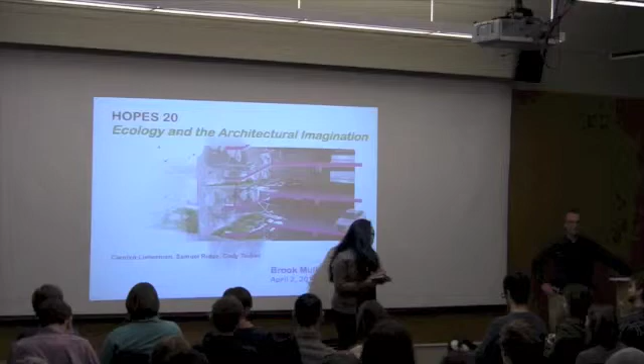So Cassia told me to bellow out. Is this okay? Can you hear me? Okay. The bad news is the book is out, but it hasn't arrived. It's really frustrating because I was hoping to make a killing on you all.

But I'm happy to offer a sneak preview, and I think it'll be very evident over the course of this talk what an enormous influence the HOPES Conference has had on my own thinking, so it seems like a very fitting occasion to talk about some of the ideas that influence the book.

Before I begin, I want to express my indebtedness to many people. This is an incredible intellectual community at this university. My colleagues in the Department of Architecture and the School of Architecture and Allied Arts, and I would say the landscape architecture faculty, have had a huge influence on this project.

Karin Knudsen is here, a former student, a practitioner in town. We co-authored a paper together that really makes its way into this book. Leonard Huey, another student of mine, we've co-authored papers together, who's off on his own teaching career trajectory right now. Howard Davis and Peter Keyes, we co-teach the Architectural Context, Place, and Culture course.

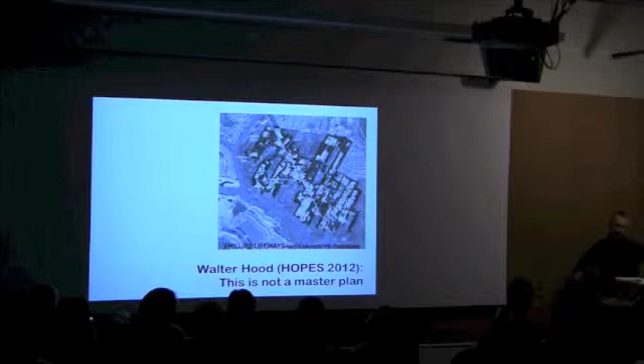So this is a project that Walter Hood did. This is an African-American low-income community in South Carolina that has been occupied since emancipation. There's this low-density suburban sprawl that's encroaching on this. They're trying to preserve some aspects of their community, and he felt that it was inappropriate to describe this as a master plan. He ended up calling it a life-ways plan, that the patterns of living that were what made this community should emerge out of this, as opposed to a more top-down approach.

And so we just did a parking garage studio this winter, but if you call it a parking garage, you've already lost—it's already this dark, damp, inhumane environment. And so we found ourselves thinking about other ways of talking about what this kind of structure could be.

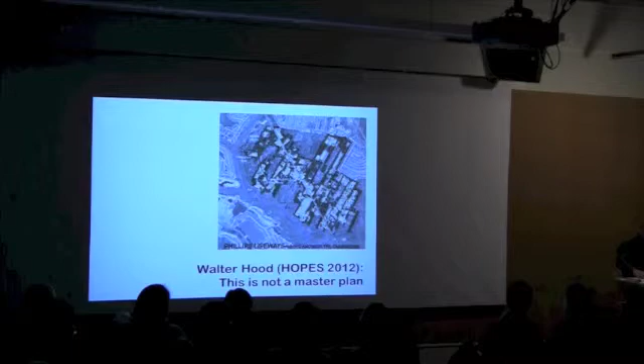Political ecologist James Evans points out a contradiction, that we expect denser cities at the same time we expect them to perform in a more sustainable way. And in some ways this isn't a contradiction—denser settlements are more energy efficient naturally as compared to low-density sprawl. But in some ways, the challenges are greatly exacerbated. We think about challenges related to clean air and clean water and habitat quality and the urban heat island effect and so on and so forth.

And this is where design comes in, as the landscape architect Randolph Hester, in his book Design for Ecological Democracy, so convincingly argues—that that's the inherent nature of the designer, is to identify contradictions, actually seek them, and try to synthesize them and resolve them.

So we must conceive of the city as a locus of ecological possibility. There are many reasons for this. I'm not going to go into detail, but we could speak, for example, of species area curves and the encroachment of human-dominated landscapes on all parts of the land and what this suggests as far as extinction rates.

Or we could think of the fact that cities were often built in places of high biological productivity. Or we could look at the long-term ecological research findings that suggest that there are more species occupying urban environments than we ever imagined. And so if we design urban environments differently, we could make it that much more possible to harbor non-human species.

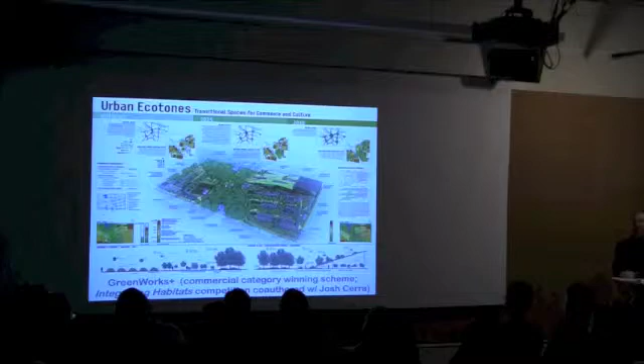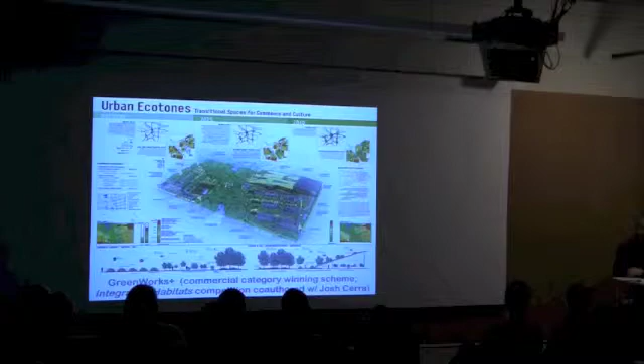The city is an ecosystem like a grassland or a forest, but unlike a grassland or forest, we could design it to be more like one if we wanted to, so we can use the adaptive capacity of the city to its fullest advantage.

Mark Johnson, in landscape architecture, suggests that we are only now developing frameworks to harness hard urban systems, the very systems seen as primary contributors to ecological degradation, as one locus for habitat regeneration.

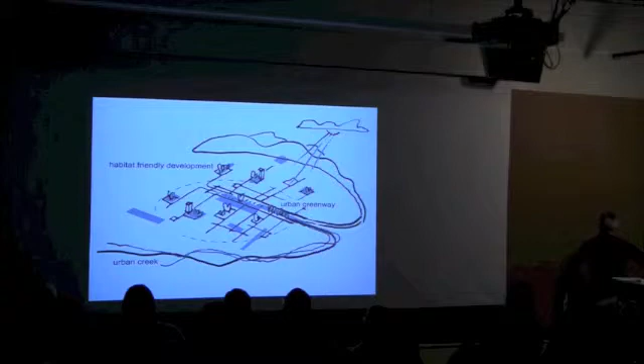There are many facets to this harnessing, one of which pertains to the need to create greater spatial heterogeneity in urban environments. For example, the making of a more sinuous path from the roof to the river so as to slow down stormwater flows and put it to work, or by providing more diverse habitat structures and pathways.

So although this passage pertains to the deceleration of stormwater as a design opportunity, it also corresponds to a broader range of ecological considerations.

Reassessment of the value of underutilized space and the desirability of prolonged transference prompt metaphorical constructs emphasizing surface tension, hovering over and passing through, the staggering of eddies and incorporation of relief valves, variegation, scored, raked, and modeled surfaces, increase in roughness coefficient, and offsets in the X, Y, and Z.

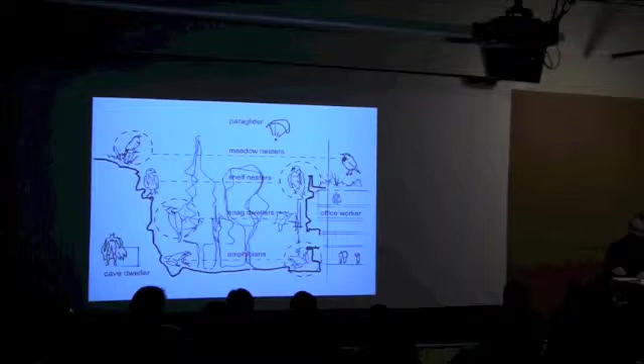A challenge becomes achieving inefficient efficiencies, where certain elements retain compact shapeliness, formal simplicity, and low surface-to-volume ratios—the thermal envelopes of buildings, for example—while associated features gain in morphological complexity in support of habitat function, and where advantage is sought in the interstices.

We're going to find out that 2007 was an absolutely epic year of HOPES, because a lot of these slides are from authors of books who appeared that year.

Joan Iverson Nassauer, the landscape architect, argues that we have to focus on the aggregate of innumerable decisions on private land holdings, that the Jeffersonian small-scale lot is our inheritance for better or worse. People manage those sites, their buildings, their landscapes for reasons other than habitat value, but perhaps with the right incentives we could think of them as aggregating and contributing to a greater system.

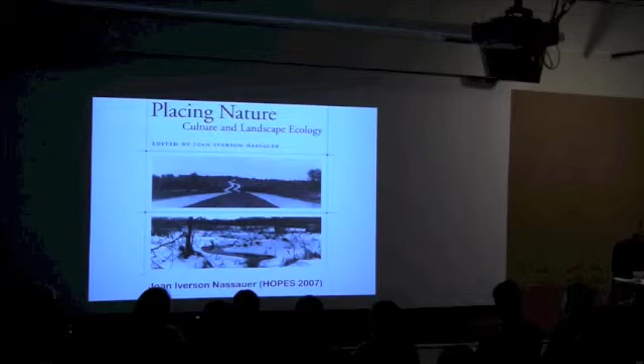We are really lucky in Oregon to have such a progressive planning body as Portland Metro, the only elected regional government in the United States, and their Nature in Neighborhoods program.

It mapped habitat conservation areas throughout the Portland metropolitan region—lands that are privately owned which have significant habitat value, that if maintained, preserved, or improved, could greatly enhance the publicly held lands that operate as the backbone of functioning ecologies in the metropolitan region.

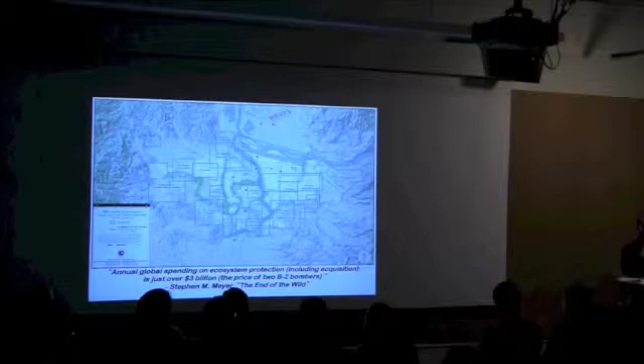So they provided incentives for developers and landowners to think about developing. If there's an urban growth boundary, there is likely to be a lot of infill development, which is probably preferred to expanding the boundary. Maybe we shouldn't be building on places with high habitat conservation value, but it is probably going to happen.

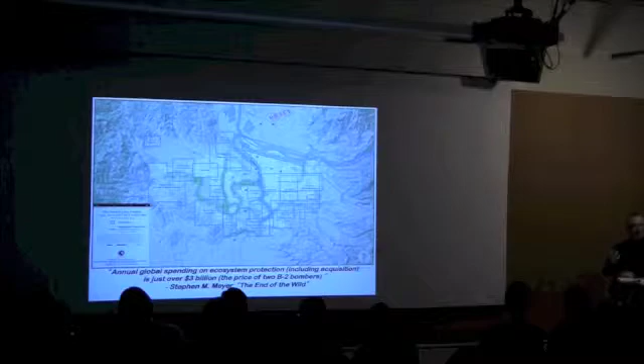So are there ways that it could happen so as to not only avoid harm, but actually improve the biological baseline of these sites? We are not recreating nature.

We are talking about human-dominated landscapes and what landscape architects call the creation of novel landscapes. So we can't reestablish ecosystems in all their complexity, but we can reintroduce or encourage certain functions. An important and difficult question becomes which ones—are there umbrella functions, for example, that help set other processes in motion?

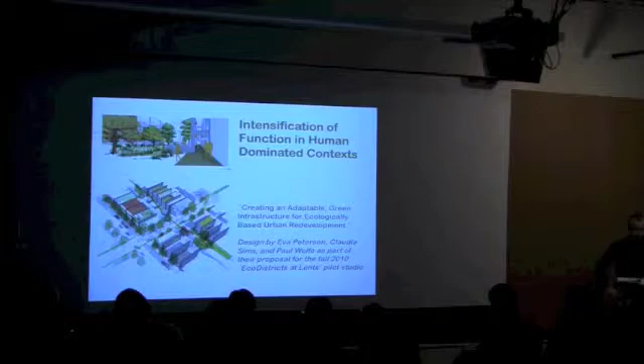I would agree completely with planners and landscape architects that if we don't make decisions thoughtfully at the landscape, region, metropolitan, or neighborhood scale, there's not much I would be able to do as an architectural designer working at the site scale. But that happens to be the scale at which I've operated in professional practice.

I've been really interested in asking how individual sites, individual projects on individual sites, what roles can they play relative to a larger urban ecosystem? And that role will vary depending on the location of the project and its use, and so many other things.

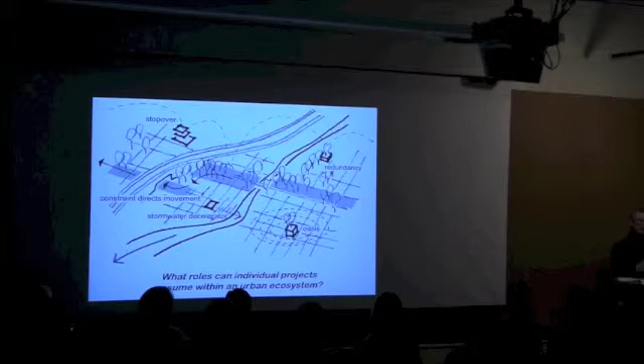We're actually starting to see, through initiatives like the eco-districts, the implementation of some models where we can begin to see a financial benefit to collaborating at these neighborhood scales.

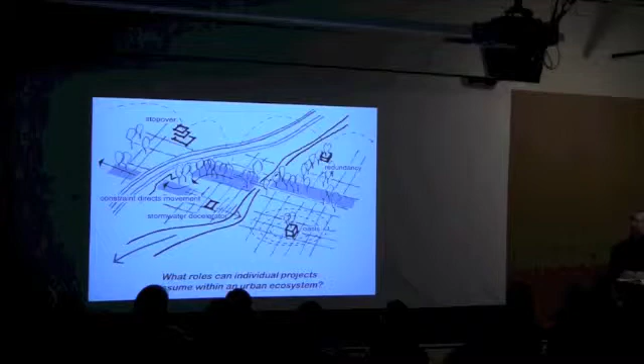My site is low and wet and it's great for collecting water, and yours is high and dry and it's great for collecting sun—is there a way we could partner so that we can avoid this sort of Grizzly Adams loner sustainability approach to zero energy buildings, which doesn't make a whole lot of sense to me given that we're in an urban environment where we can pool resources. That's the very advantage of being in a city.

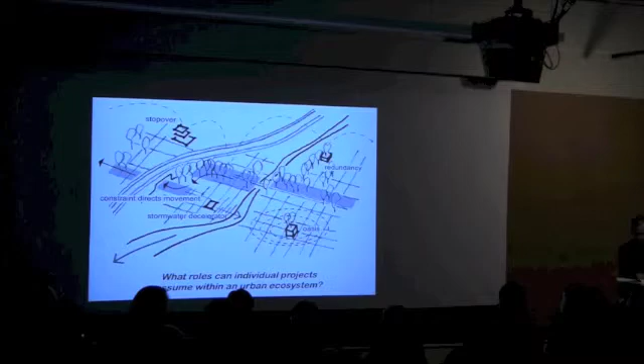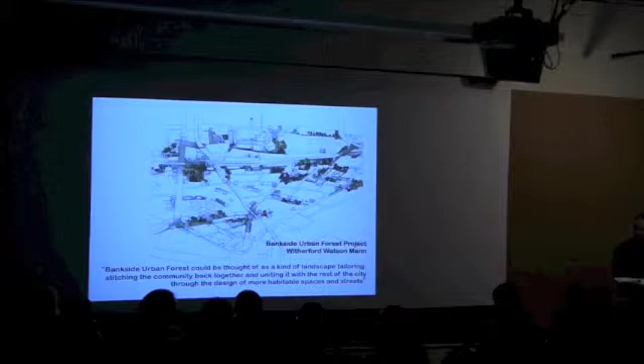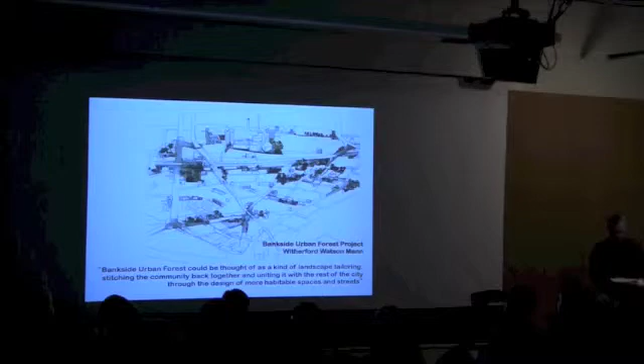Although site-scale interventions provide the focus of the book, urban ecological design as functional and spatial collapsing must occur at multiple scales. Public transit corridors with properly configured rights-of-ways can double as corridors that facilitate wildlife crossings. Urban alleyways can be sites for transmission of water, power, cyclists, social ferment, native birds and pollinators. Buildings can frame and furnish niches and other habitat structures for a variety of species. Ecological design is informed, resourcefully minded, radically intensified placemaking for a multiplicity of lifestyles and life histories.

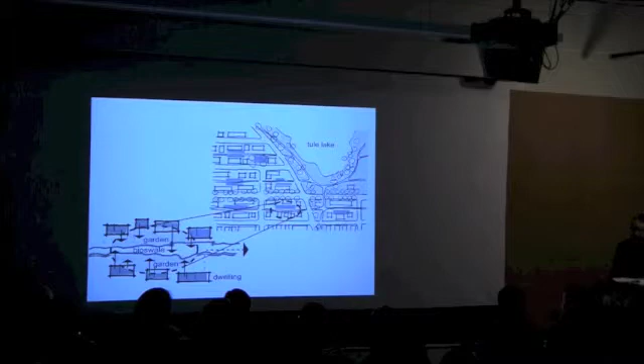The question is, how can we make that happen at a much denser scale than that previous project, because that's what we're looking at now.

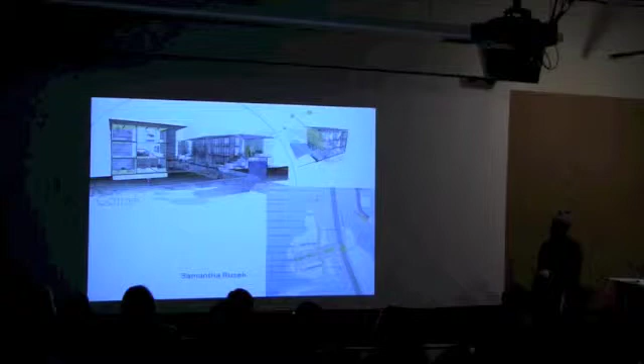This is a project by student Sam Russick, and it's wonderful where the water gathers. There's a unit, another unit. The water gathers, there's a cistern. That's where the stairway between units is. So where the people collect is where the water collects, and then the next realm out is the alley space, which is where the water goes. Eventually the water makes its way, cleansed, cooled, and oxygenated to the Willamette River. And again, the social diagram and the ecological diagram coincide.

If disturbances can be positive, making sequestered resources available to an ecosystem, might we think of architectures as instigating disturbance regimes and recognize more specifically ways development alters flows - hydrological flows, energy flows, nutrient flows? We are not just talking about introducing bioswales on a site. In increasingly dense contexts, we are engaging in systemic morphological alterations, combinations of landscapes and buildings that, with heightened intentionality, help establish better functioning ecologies.

Shed roofs are a part of the watershed. These are some Oregon density projects, and I would really strongly encourage you to attend Juan Yu's lecture on Saturday at 2 p.m. as part of the HOPES conference. She's a professor of architecture at the University of Hong Kong, and she's been doing similar kinds of studios that I have - these urban ecology studios.

But her studios are necessarily on steroids because of the context in which she operates. It's crazy - Hong Kong is in the Pearl Delta region. The Pearl Delta region is the same size as the Willamette Valley. The Willamette Valley has 2.7 million people. The Pearl Delta region has 127 million people. Again, I would encourage you to attend on Saturday and see where certain parts of the world are headed and how they're trying to deal with these enormous challenges.

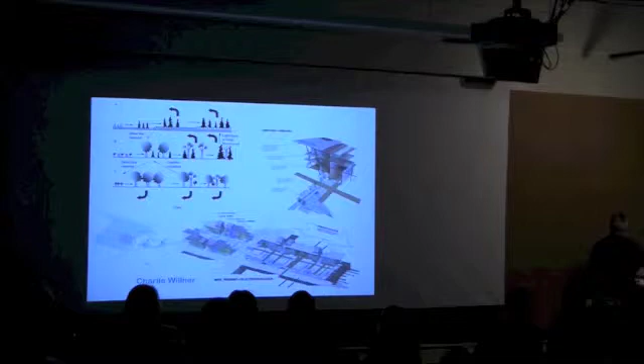The notion of gap dynamics that apply to forest ecosystems could perhaps be deployed in an urban context where we reopen the tarmac and where demolition and excavation with ecological intent is a fundamental part of bringing machines in to build buildings.

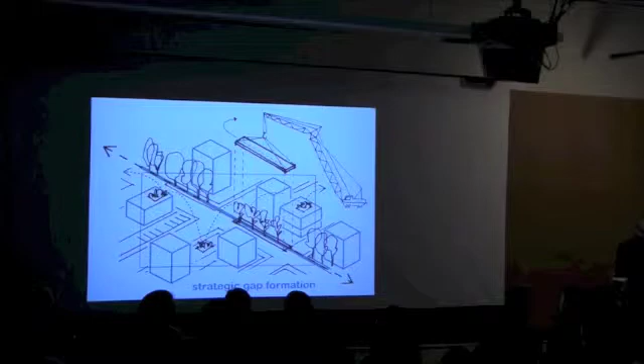This is a project from two years ago by Kristin Kelsey, where the wetland harvesting machine - where spatial quality, site experience, environmental education, and the creation of an architectural framework - are coincident with regenerative processes.

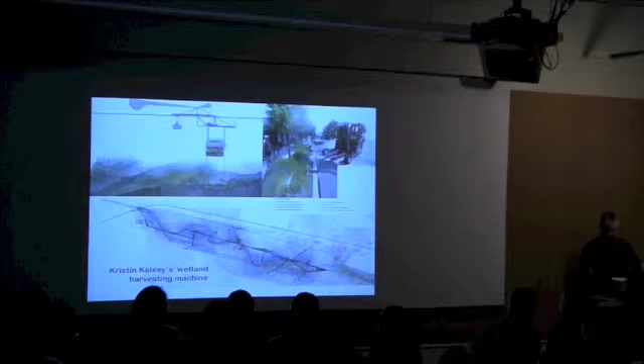So you can tell I've embarked on a set of more metaphorical speculations for making ecologically attuned urban architectures. Another wonderful quote from Bart Johnson in the Department of Landscape Architecture: the scaffold is a wonderful metaphorical structure that allows for new forms to be created, but does not determine those forms completely.

Here's a scaffold project by Blackbird Architects in Santa Barbara. This is an office building for the Air Pollution Control District of Santa Barbara County. Very inexpensive building, a box. That was what they could afford. It's a simple box, actually a very lovely light-filled box. Boxes can be just great.

And then independent of that is this freestanding trellis structure. There are telephone poles and canvas shade cloths. This is right after construction, so the vines have subsequently taken over. As the vines take over, the shade cloth deteriorates and you still have shade. So this provides shade, and it also pre-treats the air before it enters the office building. It offers some habitat value.

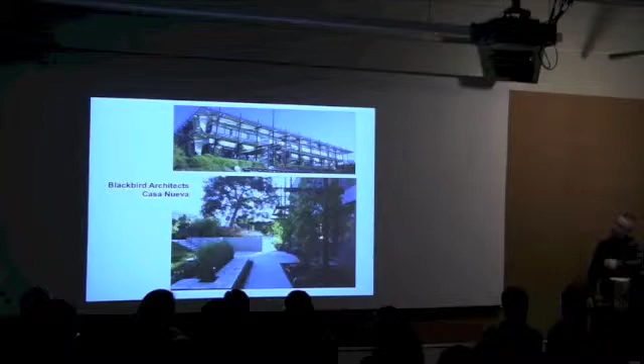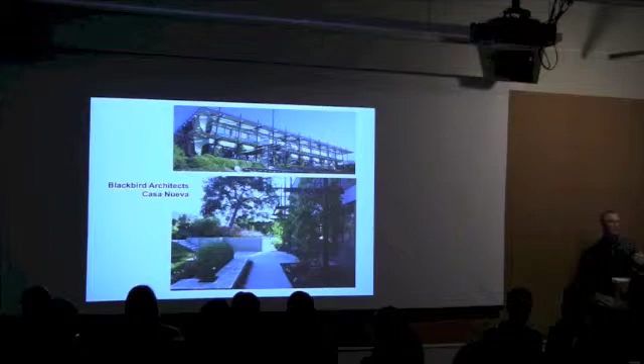It's also where the 101 heading south approaches it and then turns again in an S-turn. So this green wall is the billboard for the Air Pollution Control District of Santa Barbara County, which I think is wonderful. The symbolism and the human function and the ecological function are aligned.

Architectural elements can cohere as a datum, frame, or series of planes that, through their stable configuration, elevate awareness of both the cyclical temporality and sudden emergence of ecological happenings. Conversely, landscape ecological features might frame the theater of life taking place within a human-focused interior.

Architectural framing devices can increase the didactic value and experimental potential of an urban landscape. A bracketed device encourages measurement and counting, analysis of effects of orientation, changes of occupation and intensity, and attractiveness of features to colonization, etc. A frame space is a real-time, life-size, three-dimensional graph facilitating plotting and comparison.

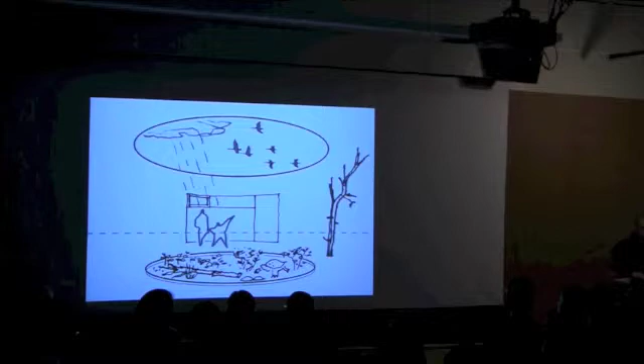We could look at an incredibly wonderful project like Bruno Taut's Horseshoe, a high-density housing project in Berlin, which is basically a frame within a frame within a frame.

You can start to imagine that the things we create as necessary for us to dwell and live and work could be flipped and thought of as opportunities for experimentation with urban ecological systems. Just want to point out, this is a very inexpensive project.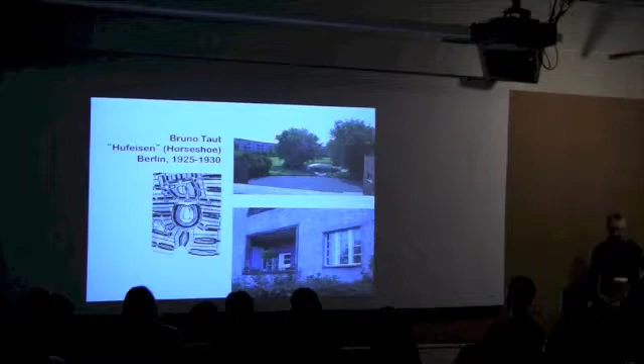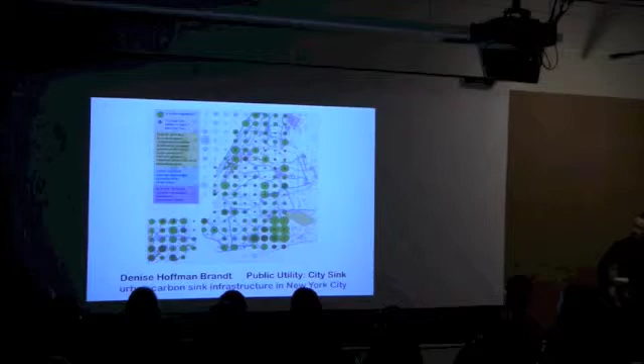Or perhaps we can make use of an entire city grid for the purposes of experimentation. The urban grid is a matrix of endless extension of economic opportunity. In many ways, the great neutralizer of otherness, it could provide the framework for ecologically inclusive, spatially heterogeneous systems.

Superimposition of new layers - stormwater alleys and pollinator corridors - inspired by, and that fortify, biological and hydrological processes, augment the functional capacity of the inherited order of streets.

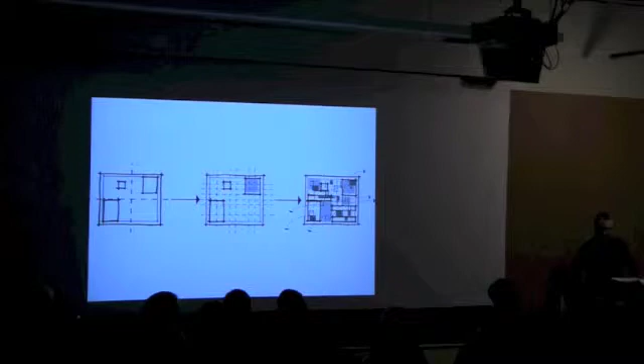The latter preserve block-like formality, while inner courts perform a different, more fluid manner of work and assume less fixed identities in the process. These new layers create openings that might positively establish more airy, animated block interiors and buildings that in turn benefit from the presence of life.

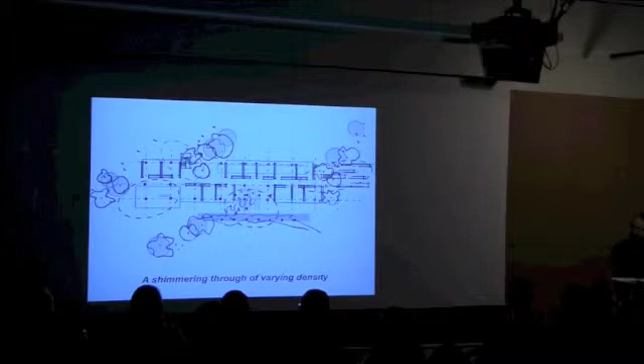I'm talking largely about landscape architecture now, but what I'm really interested in is a fusion. Rather than the customarily high level of resolution of a building and a ghosting of the landscape in an architectural proposition, or a rendering of the landscape around the white blank box building as placeholder in a landscape architectural investigation, stitching of relationships motivates design inquiry.

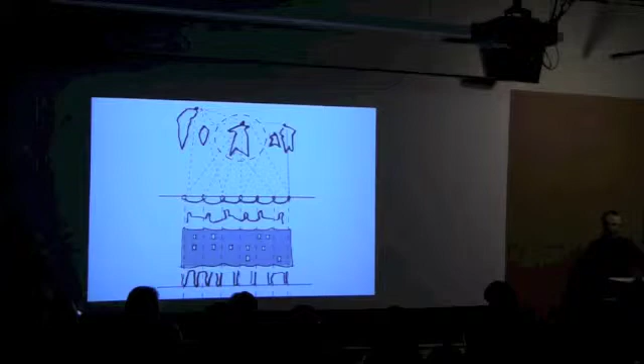There's a whole section of the book on bodies, the metaphor of the body, which has an incredibly detailed and long history in architecture - the building as a body - and I trace it very lightly. One instance corresponding to this image, an idea that Ted Toadvine shared with me here in the front row, thinking about Viennese bodies, turn of the century, so a project like the Zacherl House by Plecnik.

Freud's illuminations on the unconscious parallel Viennese secessionist architects' interest in the design of facades for multi-story buildings as cloak-like skins, intimating mysteriously complex interiors, the preserves of domestic arrangements that are in turn the inhibiting shelters of personal drive.

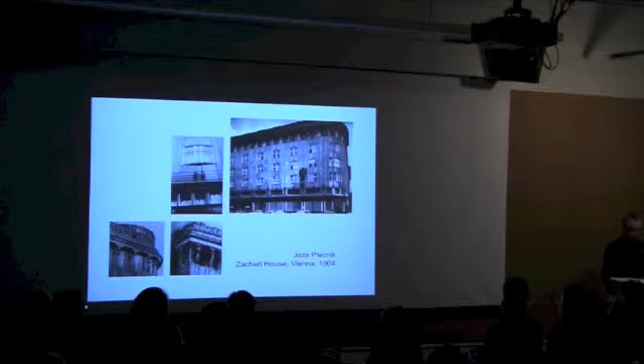Later, in the 20s and the decades that followed, advancements in understanding the genetics of organisms decenter the language of the body such that the human figure no longer occupies a privileged location. Indeed today, design culture embraces an esteemed language of animal architecture, through systems thinking and cybernetics. Bio-eco terms such as adaptability, resilience, cellular, generative, emergent, and symbiotic influence architectural design explorations, in particular those driven digitally.

Small-scale biological phenomena such as genetic switches, the channeling and selective inhibition of information flows, and other processes determining the growth of the organism inspire a new design generation interested in rule-governed architectural morphology. A body once again projects upon a building surface, but it is a different body requiring higher levels of magnification.

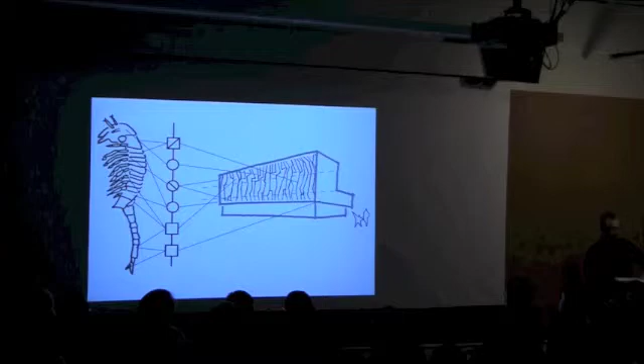While there is much to be said for conceptualizing buildings as organisms, this manner of thought has tended to produce relatively limited, insular experiments focusing on scaling up smaller biological phenomena to design individual works of architecture or significant components of them. In this body-to-building mapping, architects borrow biological and ecological terms in ways that may not significantly impact ecological function.

This is from the Association for Computer Aided Design in Architecture. I think it's incredible work, so this is not intended as a criticism. This is representative of the way we're thinking about biology and ecology in architecture today—we're sort of scaling up this phenomenon again. And I'm just concerned: why can't we engage these issues in ways that could have some significant bearing on non-human life forms?

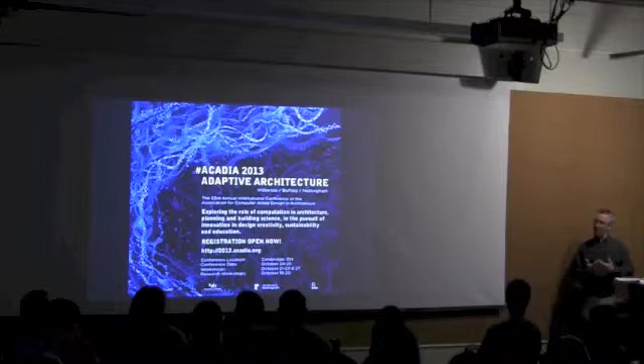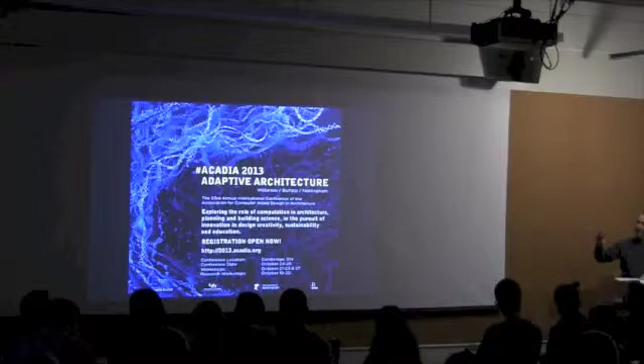Josh and I are working on a paper right after the book came out called Adaptive Architectures, and we came upon this on Google, so it's interesting. I'll talk a little bit about how we're thinking about adaptive architecture momentarily.

So I go on to describe an alternative orientation, one that is actively relational, focused less exclusively on internal biological circuitry and more on the metabolic exchange at the porous boundaries of beings and environments.

As is the case with the IBM project, as many of you know, I worked on this for four years with Behnisch and Partner in Stuttgart, where we had this notion of the building as an organism—that the garden structure would be this relatively fixed armature, a repeating structure between which the building grows. If the building needed to grow over time, the landscape structure anticipated how that growth might take place. We had this idea that the greenhouse roofs spanning between office wings would be the lungs for the project, and that the atria gardens created would be the heart of the project.

It was a double skin glazed system—we just took one of the pieces of glass and put it up on the roof. So what that meant was this piece of glass, this facade, could be much more porous. We talked about the porous skins of the building.

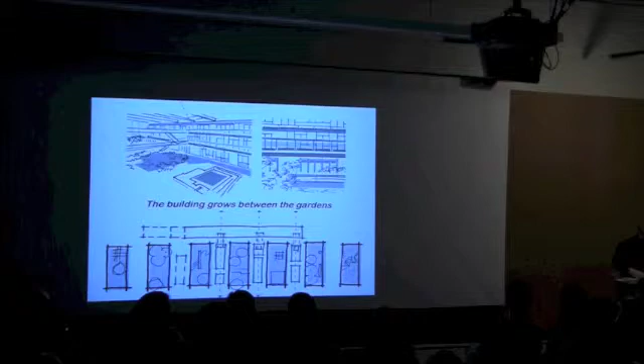I recognize the danger of singling out any one aspect of the design process, which is incredibly complex. In this case, I single out conceptual intent described metaphorically, and I also describe how projects like this build from multiple metaphorical influences. Important is the fact that the IBM project team entertained multiple metaphors—project as garden and project as city, as examples, in addition to organism.

Rich architectures, the effectiveness of translation from conception to drawing to building, require free commerce of plural images: buildings as organisms and landscapes, bodies within gardens and buildings, cities as systems of ecologies. Scenes of scalar and combinatory thinking encourage creation of diverse spatiothermal gradients generated from highly economical material assemblages. Entailments derived from several source domains cast simple sets of architectural features in complex parts.

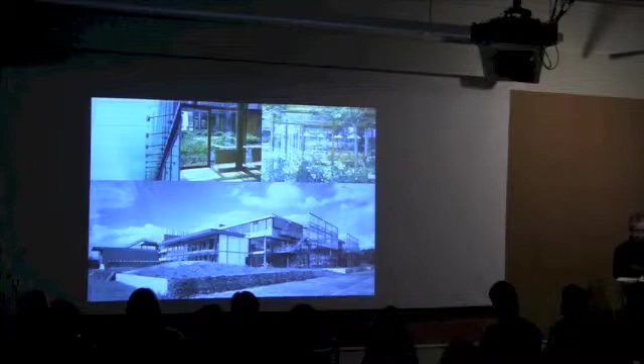This little section builds from the paper that Karin and I co-authored, where we discussed the proliferation of landscape-derived metaphors in contemporary architectural practice. This is another example—there's a whole history of using the landscape as a metaphorical inspiration for making architecture, but there happens to be greater attention to this as a source for making architecture today.

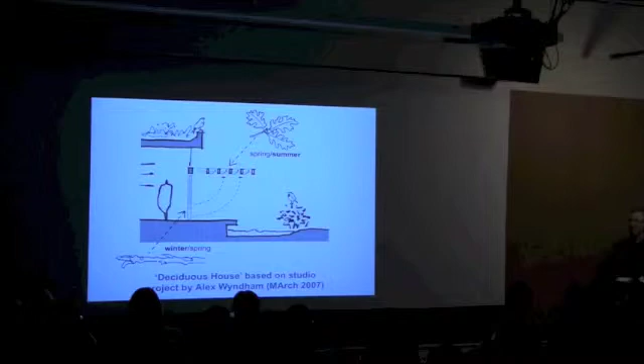In the paper we wrote, we made a distinction between what we call emulative uses of the landscape, where the building design itself is inspired by certain aspects of the landscape—could be formal aspects, could be performance-based aspects. This is what biomimicry is, right? We design human-made artifacts based on inspiration from nature. Or the Acadia example of adaptive architecture discussed previously.

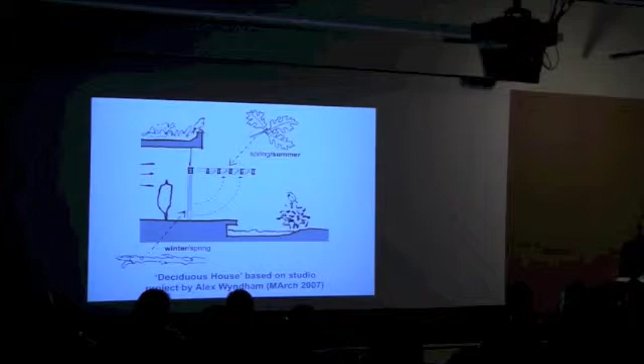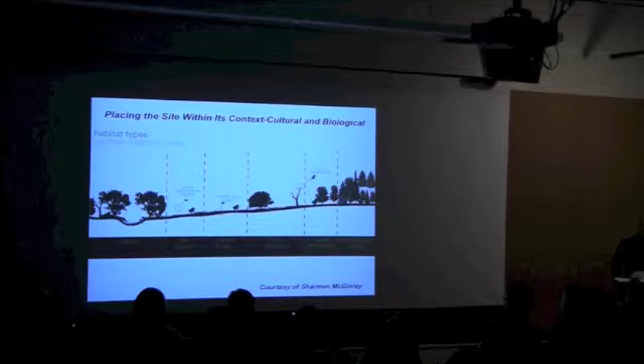So we have the emulative, and then there's also this interactive approach, where we think about understanding habitat types in the natural landscape and how the building could be a support mechanism for these habitat types. So it's more of an interactive way—the building isn't nature, the building is providing support for these processes.

This was a really incredible Master of Landscape Architecture thesis by Shannon McGinley from 2008, where she really explored how this would work—even to the point where living roofs would be subject to disturbance regimes. Maybe you mow the buildings, but there's actually a building in Ottawa where they burn the roof twice a year. Architecture must burn.

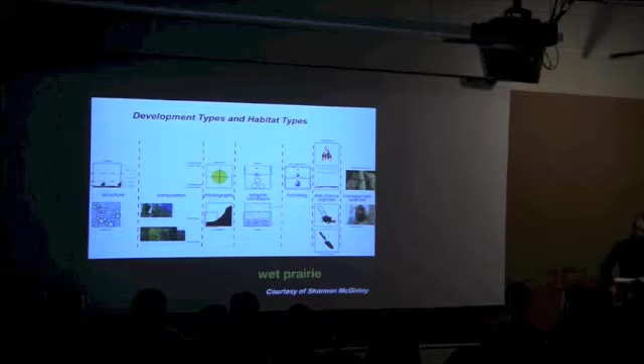And then the hero for me with this 2007 epic HOPES year is Paul Kephart, who speaks of his projects as works of eco-sabotage when the architects he works with are indifferent to his ecological preoccupations.

There's a great story he told when he lectured, that he was working on a green roof in Seattle, and architects said they'd like the roof to blossom white to recall the time when seabirds flocked to the site. He said, or we could create the conditions for the seabirds to return to the site.

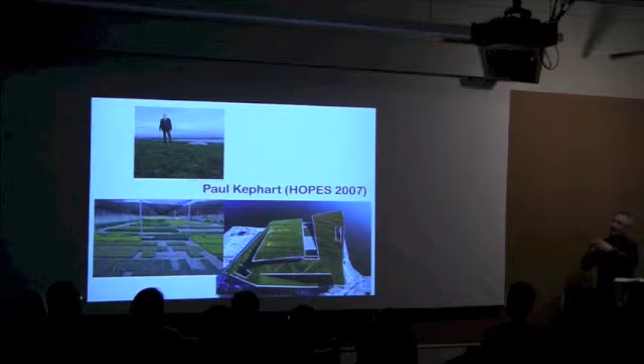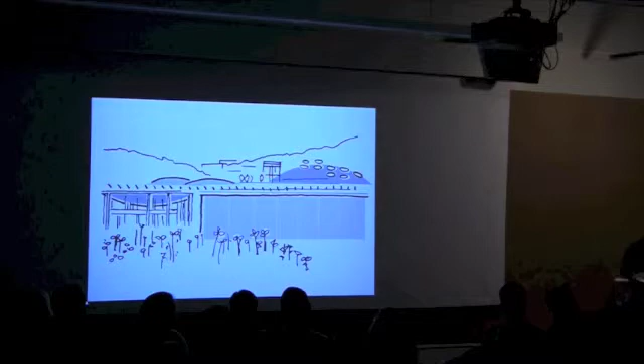So he's doing these vast projects, he's got a design studio and a nursery. He's thinking about living roofs as nurseries for endangered wildflowers and grasses. An amazing thing. And he gets involved in Renzo Piano's California Academy of Sciences project.

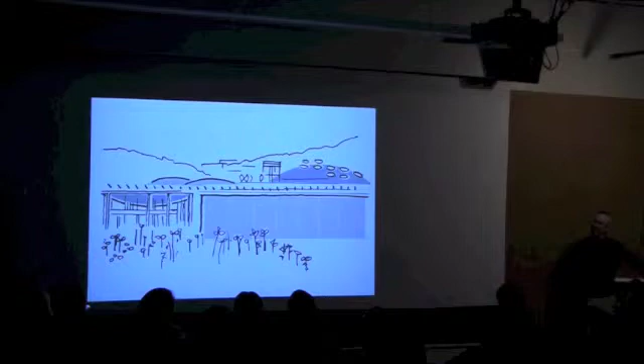They had this emulative notion that these undulating living roofs would mimic the Golden Gate Hills in the backdrop. And here's an ecologist designer looking at these roofs, looking at the fact that there's slope and shade, sun, relative moisture and relative dryness, and he has this opportunity to create much more diverse conditions than what is ordinarily possible on a green roof.

Or the Transbay Terminal under construction - I think this is the way I would really strongly encourage architects to think. This is the Transbay Terminal where you have BART lines and bus lines intersecting, and you continually have to supply fresh air to the underground because people need a constant supply of fresh air if they're underground, and you have to eject moist, stale air.

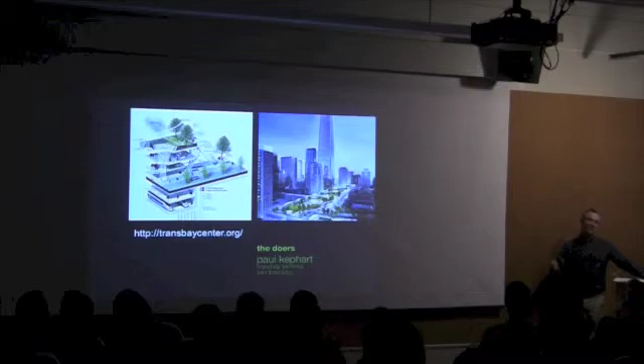We think the job of our architect, working with the mechanical engineers, is to bring in the fresh air, and whatever happens to the stale air, it's really not my problem. Well, he said with the moist air, we could start to use that to create estuarine ecosystems on the roof, which could support all kinds of endangered plants.

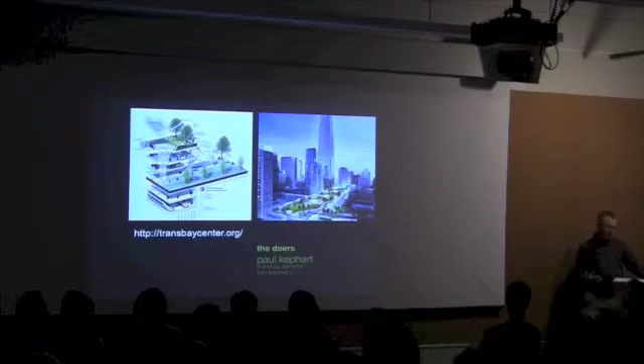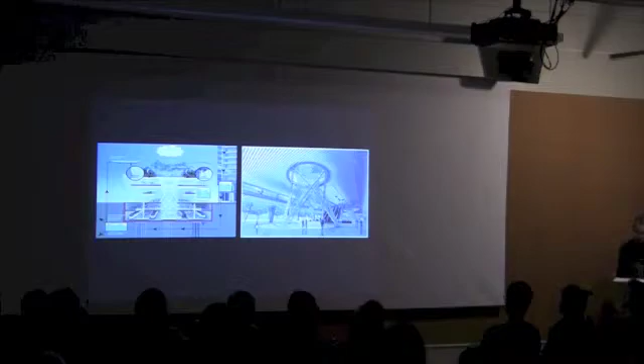I think it's a beautiful way to think about how works of architecture can become components of viable urban ecology - life-enhancing and resourcefully abundant systems embedded in and interacting with others of greater magnitude. This notion really inspired the adaptive architectures paper that Josh and I wrote, which in turn was the inspiration for the studio project I'm about to talk about.

Could works of architecture, could buildings be cued to changes in the environment and adapt their behavior in response to those changes? That's really the question. And then could they communicate with other buildings to also adapt similarly?

So we decided to look at wetlands, which have been really very much compromised in urban environments, wetlands adjacent to rivers, and we decided to look at the parking garage as the problem child of the urban environment, and see if we could flip it so that a parking garage, or a parking marsh, could behave more constructively.

The idea is, in the early history of the parking garage, it would be a full-service gig - you would pay to park your car, get an oil change, and get a car wash. So the thought with this project is you gather all the water from the roofs.

You gather the water from the adjacent Ross Island Bridge, for many of the student projects in the studio. You gather water from neighboring sites. You use that water to clean the car, which is, as many of you know, this horrible problem relative to urban waterways - copper, motor oil, heavy metals, just incredibly problematic.

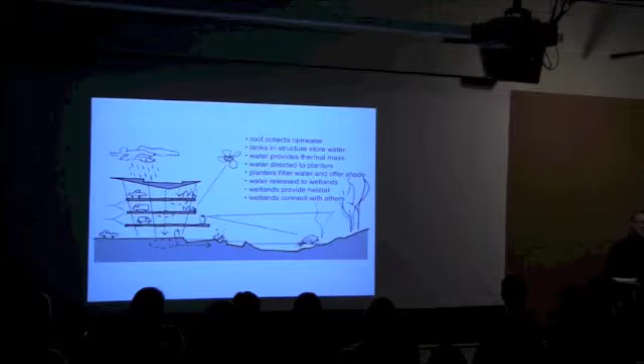We're on the South Waterfront site. It's contaminated soils, that's where they want to develop. The soils have been capped by this geotextile mat. Our ecologist Mark Wilson, working with us, says that's a perfect sub-base for wetlands. So we're going to construct wetlands atop contaminated soils with a protective layer, adjacent to the river, in a gravel deposition part of the Willamette where salmon will stop if they can find food on their way up or down the river.

So there were 6 amazing projects. I unfortunately only have images for 3 right now, but all 6 deserve some airtime. Here's a project where you have a mechanical lift, you park the car, you wash the car, you use the water to grow algae, you use the algae to make biofuel, you use the algae to clean the water, and then you give the water over to the wetlands and to the river.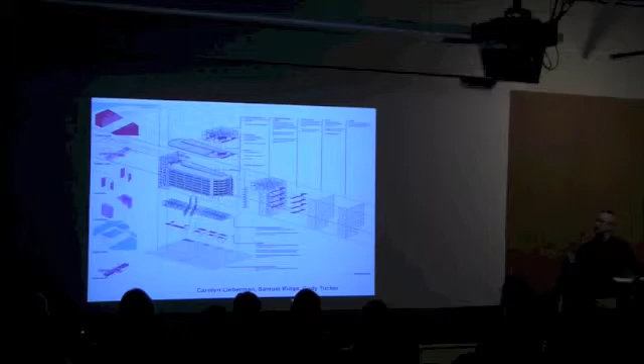Or this scheme where they're actually looking at just these, almost like a prosthetic device that you can attach not just to this building, but to the system of elements that you could attach to any parking garage or any number of buildings in the urban environment that could filter out pollutants. It becomes a circulation spine where you gather water and treat it, as well as gather people and life.

And we just found out Monday that this team, Carolyn, Samuel, and Cody, were named a finalist for the Royal Society of Art Student Design Award for 2014. Congratulations.

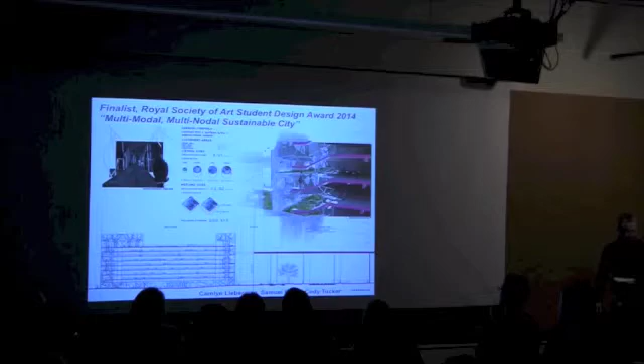The urbanism metaphor has supplanted the machine metaphor. Le Corbusier, 1924: architecture is a machine for living in, probably the most influential sentence in architecture in the 20th century. And with initiatives like the Living Building Challenge, we see that the organism metaphor has arrived. Yet what I end up advocating for in the book is a hybridization of metaphors. Certainly there is a measure of rightness to a machine-like characterization of architecture, given the manner in which architectures are produced, the efficiencies and levels of performance expected, and the technologies projects consist of and house. Of interest are the entailments ordinarily associated with the machine metaphor and how the conceptual system alters when coupled with ideas of architecture of the landscape.

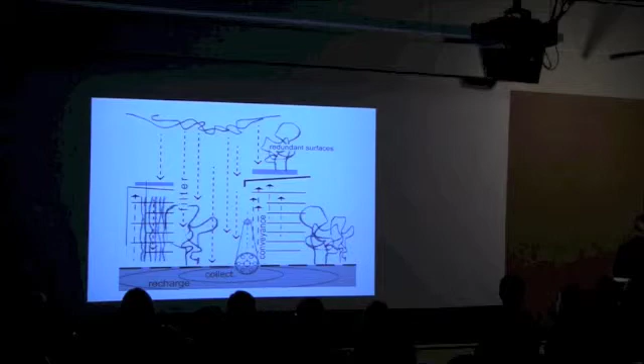Architecture will always be projections of bodies, concentrators and extensions of landscapes, and types of machines. An appropriately non-modern notion of the architectural machine would be that of prosthetic components, coordinated arrays of devices positioned within larger eco-social technical assemblages in the service of life. This would appear to be at the heart of Smout Allen's augmented landscapes project, or the work of Danish and Partners, where a conscious arranging of stock, machined parts is not an aesthetic end, but instead an enabler of expressive events, as when the hand and the handrail couple.

Many of you have seen this studio project from the Rome Summer Studio that Kathy and I taught in 2009, but it's a wonderful example of an architectural intervention as an eco-architectural prosthetic device. The water entering into Rome is one of the cleanest in the world—New York, Eugene, and Rome have the cleanest water in the world. And when it goes out to the Tiber, it's a horrible mess. So could we start to think about these things?

You actually walk down and greet the cleansed water, move up a stairwell between these sand containers that are filtering stormwater from roofs. You get up to the rooftop, you see the aqueduct in the distance, you see where the source of water comes from, and then you make your way down through these biotrays that are filtering the gray water from the apartments and back out. So it's something that operates at the immediate tactile scale, the plaza scale, the urban scale, and then it's connected to this regional hydrological system.

Or we could look at the case projects. Anna Dyson spoke at HOPES in 2010, where they really are these living walls that are cleaning water and shading light, really thinking about living systems coupled with these machine-like systems to make more efficient, more beautiful urban environments.

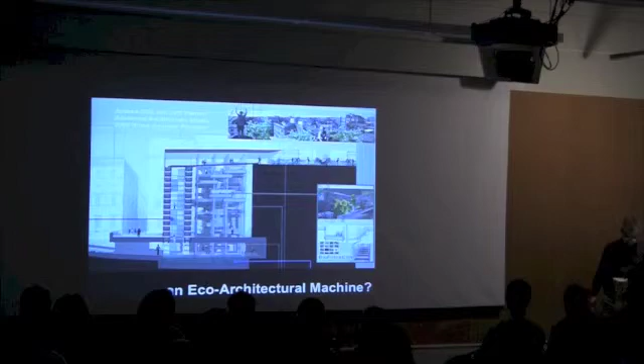David Leatherbarrow, HOPES 2007, talks about architecture as being constituted as three horizons. These projects, this project and this project, I think it asks that we reevaluate David Leatherbarrow's three horizons as he describes them in his book Uncommon Ground.

As Leatherbarrow describes it, we begin to see that this corporeal schema is enmeshed within an expanding range of distances, a structured topography that includes where I am, which is to say, where the things I now need are within reach, a middle distance, and an expansion toward the clear blue horizon, an equipmental, practical, and environmental horizon.

Not one of these can be separated from the others, hence the lateral spread of the ensemble that integrates these rings into one field, terrain, or topography. The dining room, the street, the town or landscape, differentiated but reciprocating.

And while he speaks of their inseparability, the way that he describes them and the way I have drawn them leaves one feeling that they are quite separate, that they reciprocate at a place or mood.

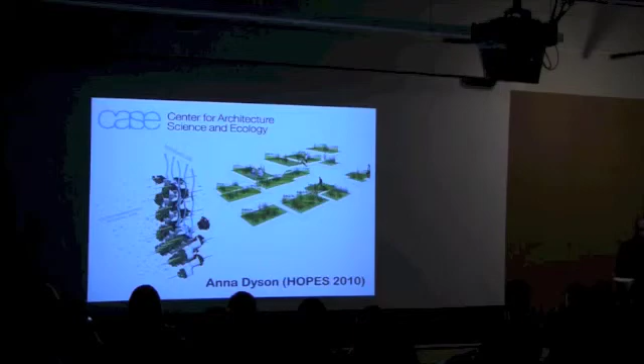What I think Case is doing, what Smoot Allen does in the Grand Egyptian Museum competition, is reconstituting horizons altogether. The middle ground, where the practical horizon drops away, the equipmental is deployed outwardly, the topographic is immediate, the equipmental is continuous with the practical and the topographic.

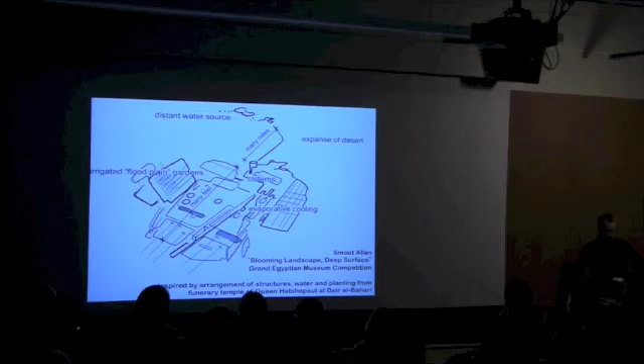With the introduction of a ribbon of water from the distant horizon to the topographic field of the project site, the museum becomes a water-cooled thermal regulatory device, a condenser, distributor, mister, and microclimatic phase changer. Arrays of ecological equipment wash over point, line, and plane.

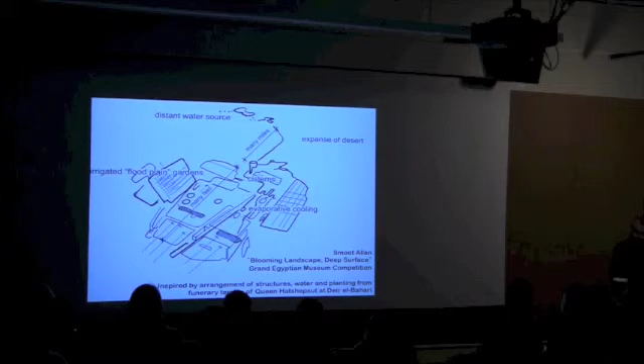And as I alluded to earlier, this collapsing of horizons, this move toward the heart of an ecological architectural urbanism requires all of the arts of the designer in collaboration with others. An ecologically based architectural design calls for it and facilitates qualities of magical realism, or what the post-humanities scholar Cary Wolfe describes as irrealism.

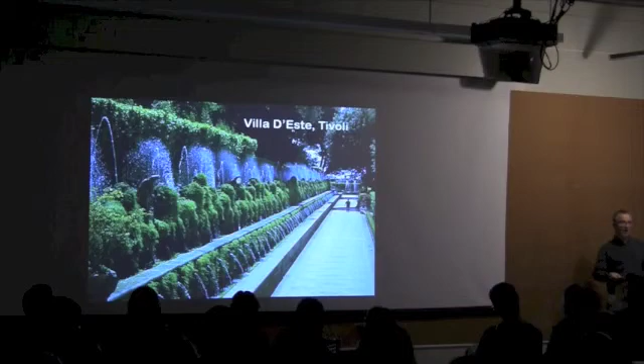Arts that inhere in ecological architectural design are directed toward the promise of grounding the fantastical in the terrain that we occupy. The gardens of Villa d'Este in Tivoli are an astonishing example of the finite turned infinite, an elaboration of aqueous reality as designed exuberance, transference and shifting of states as commentary on continuity.

The gardens honor the many presences of water, acknowledging while making light of the rules governing it, musing on the forces of gravity, and drawing people to its many features in ways that cause wonderment and thermal delight.

Today, a more consciously artistic and democratic ecological approach to design might employ frivolity as a strategy of efficiency and celebrate the scenography of a multitude of beings in everyday urban environments.

There is theatrical potential to the ecological design of the city, a staging of nature, heightening perception of unending sequences of props that exist beside and beyond the spectacle at hand. Ecologically architectural graphics script the performance of an urban nature.

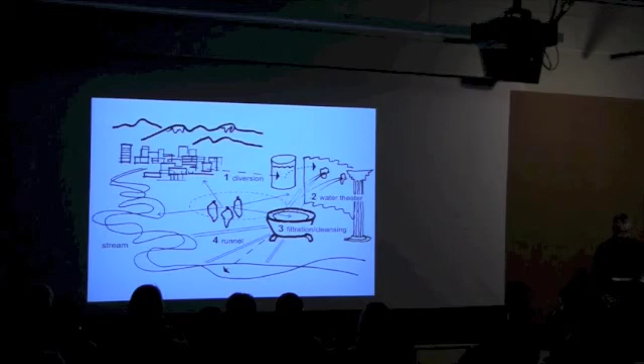And so what I am trying to say, despite the incredible challenges that we face, is what an incredible opportunity lies before us. So in conclusion,

Collaborative narrative building and shaping the ecological potential of architecture is instantiated through inventive, concerned description of the kind of the world, fragile, powerful, efficiently abundant, fantastically earthbound.

One sees value in shaping. The urban environments designers create bear enormously on the devotions and attentions felt toward those who dwell there, the ability of non-human species to flourish, and the dexterity and kindling of our imaginary. Thank you.